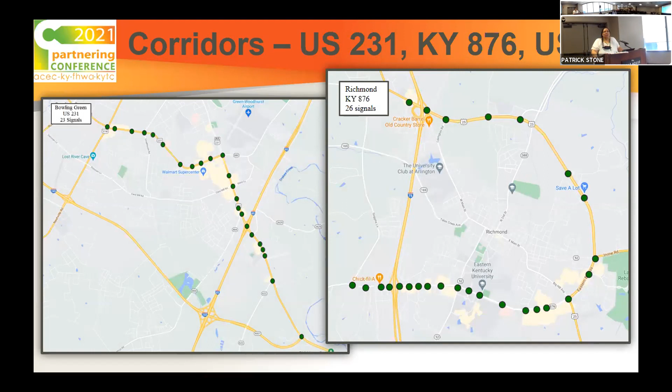As Shane mentioned, 2 corridors were selected for this project. US 231 in Bowling Green, which consists of Scottsville Road and Campbell Lane, and Kentucky 876 and US 25 in Richmond, the bypass. Several factors played a part in our decision of making these 2 corridors our proof of concept and an introduction to ATSPMs. Each corridor has unique features, as you can see, and similar.

As for Richmond, the southern part of Kentucky 876 is an urban area, whereas the northern section is more rural, which allows for uncoordinated signals, speeds of 55 miles per hour, and intersections are spaced further apart. The Richmond bypass also has on the urban section entrances for Eastern Kentucky University and the hospital, which allows for a different flow of traffic. Bowling Green has a frontage road that runs parallel along Scottsville Road, and it also has preemption with the Bowling Green City Fire Department.

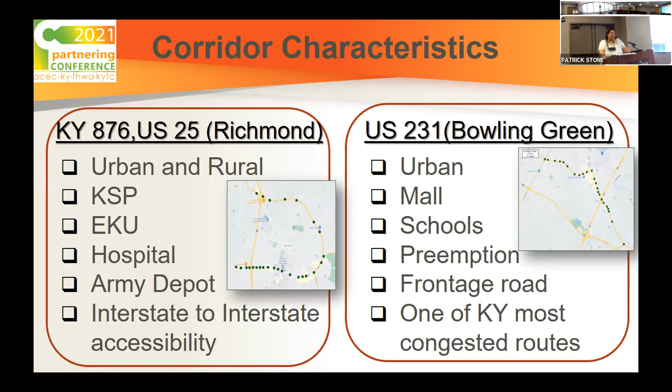As you'll notice, both of these corridors have several challenges and concerns that represent why we chose them. Congestion and spacing of the intersections and spacing of the frontage road for Bowling Green was also another key point. Spillback, which is when your left turn storage is not sufficient to hold your left turn queues and spills back into the through lane, preventing them to proceed through the intersection. We also had split failures and progression. In Richmond, we also have varying traffic with the university for football games, graduations, things like that.

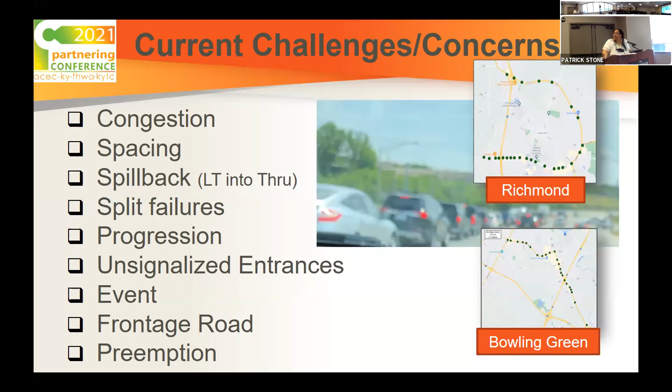And on Scottsville Road, when you look at some of those challenges, even though it's a benefit that we have the preemption for the fire department, those signals are coordinated and synchronized along the corridor. So when the preemption is activated for the fire department, that gets those signals out of sync and it affects your progression along the corridor. So Zeke will now talk about equipment upgrades.

All right. Now, as Telma just said, I'm going to be talking about the equipment that we not only upgraded, but we also had to add a few pieces to this project. Now, first off, I'm going to be talking about the controller. The controller is the brain of the traffic signal. It's what tells it what to do, when to do, and pretty much how to do it.

And we started out with a 170. Now, we've had this for about the last 30 years; it's 1970s technology. Basically, there's a 6-digit LCD display in the front with a 16-digit keypad. You have to know codes. You have to know basically exactly what you're doing in order to program anything.

Now, our predecessor, Glenn Anderson, actually developed a program called TransPHAT. And what we do with this is we use it to program the controller in a very graphical fashion. This is basically what's allowed us to use this for the last 30 years. Now, about 5 years ago, we discovered that we were going to start to have problems, not updating, but replacing and finding new equipment for the 170s.

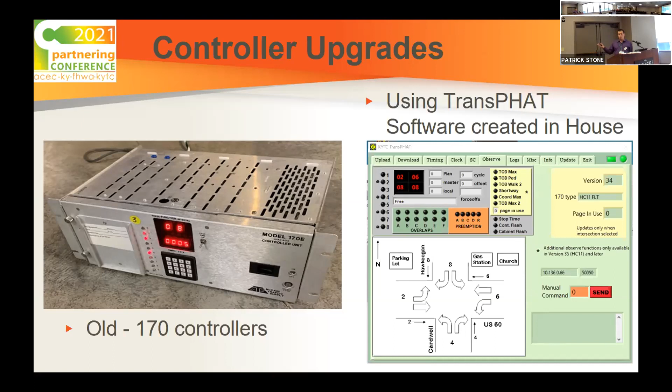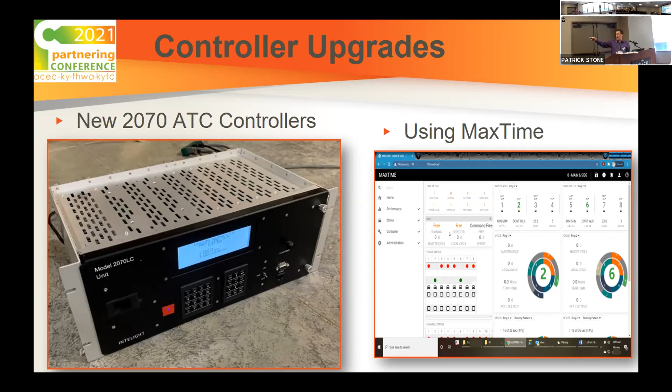So we went on a search and we decided to change to the 2070 ATC controller. This controller on the front panel has an 8-line, 40-character LCD display. Along with the 16-digit keypad, it has an additional 12 keys with arrows and escape keys. And it also serves up a web page if you're connected to it through an Ethernet connection. We use cellular routers to communicate. And you have a little taste of what the MaxTime page looks like.

Moving on, we have had to upgrade our detection. Now, I kind of have to go back to discuss what detection is like in the state of Kentucky. For about 95+% of the signals in Kentucky, we use what's called semi-actuated. What this means is that the side streets and the left turns have detection. However, the main line does not. Now, you might think, well, the main line is the most important street, so that could be problematic. But what we do is we put this on recall, so now no matter what, there's always a call on the phase.

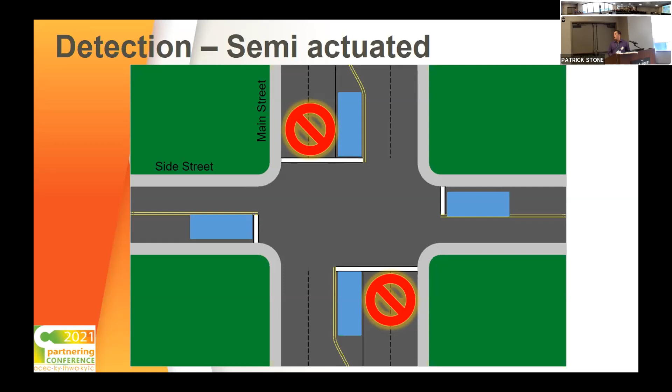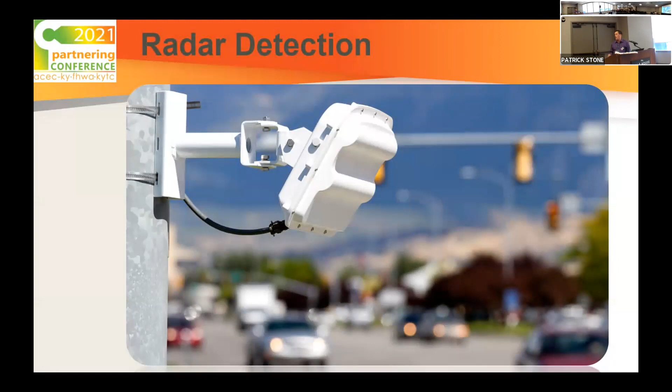Now, for the ATSPM side of the project, we needed this detection. So we had to come up with a way to fill that gap, and we decided to go with radar detection. Radar detection is very unintrusive. Basically, you can install it without having to spend too much time on the roadway. I think it took about a week on each corridor to install all of the radar detection and fill all the gaps.

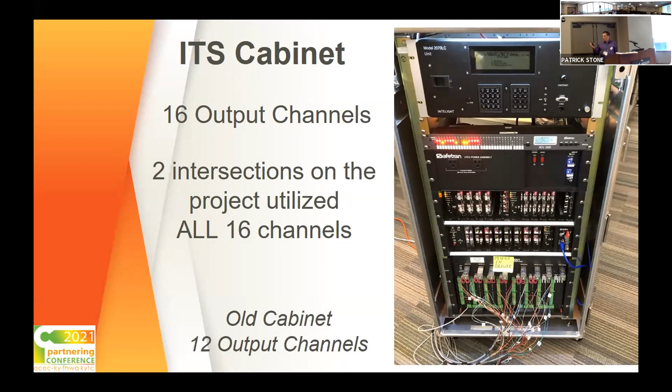Next, this one was a little more of an extra benefit. We didn't really have to do this for the project, but in 2 locations, we decided to install what we call an ITS cabinet or a serial cabinet. The biggest benefit as far as this project went was they have 16 output channels. The old cabinets only have 12 output channels.

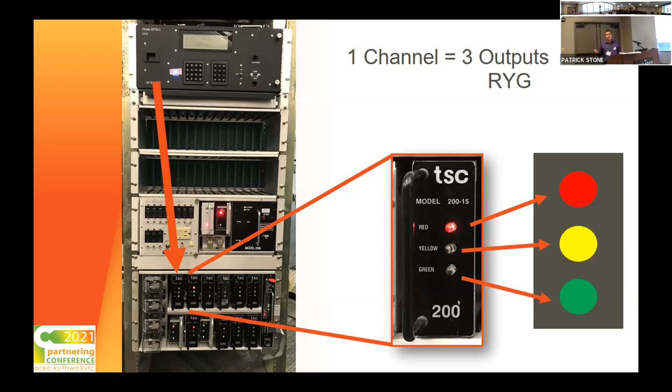Now, an output channel is 3 outputs. Typically, it's red, yellow, green for most cases, though you do have heads which are walk and don't walk, but that's a different story. So in the old cabinet, you've actually got 36 outputs, versus the new cabinet, where you now have 48 total basic lights that you can turn on and off.

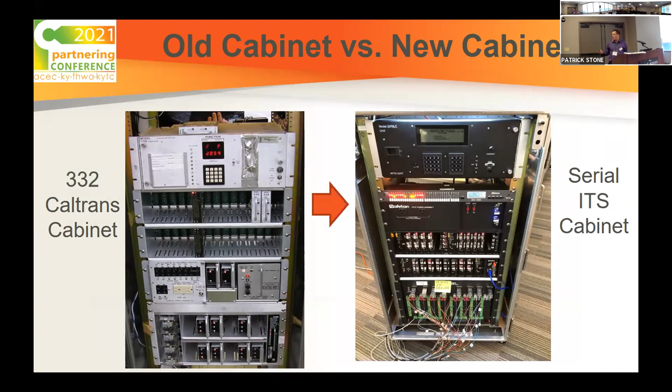Now, if you look at the left side of your screen, you'll see the 332 Caltrans cabinet that does have a 170 in it. Now, I will make a note, you can use the 2070 in the old cabinet. They work perfectly fine, and that's what we do when we're switching over. But it's considerably different than the serial cabinet here on the right side of the screen. The real key difference is how the controller communicates with the cabinet.

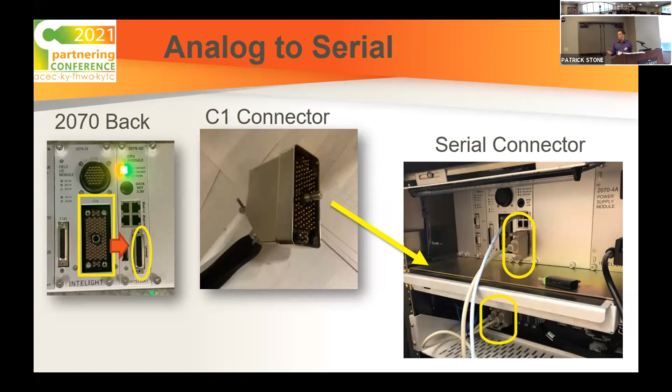On the left there, you're going to see the back of the 2070, which actually has both outputs. In the middle, you're going to see a C1 connector. That's an analog connector. Every pin controls one output. But the serial connector is basically a 25-pin printer cable, and it communicates to the controller through a digital format, or machine code, if you will.

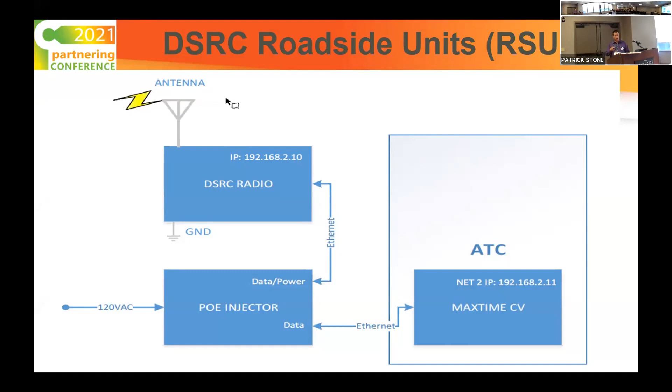Now, moving on, this is some new technology that was added to the locations, and this is the DSRC roadside unit. This is kind of a conglomerate of devices, but we call it the RSU, for roadside unit. It basically consists of a piece of software that resides on the controller, which sends data through a PoE injector, which is just power over Ethernet. It applies power to an Ethernet cable that then sends that all up to the DSRC radio.

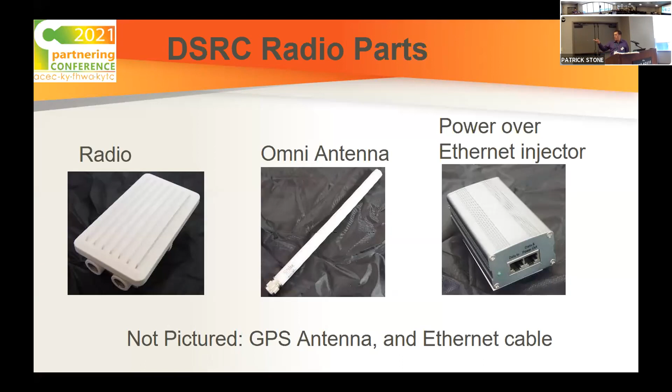And at this point, I'm going to hand it over to Telma to discuss a brief history of the ATSPM project.

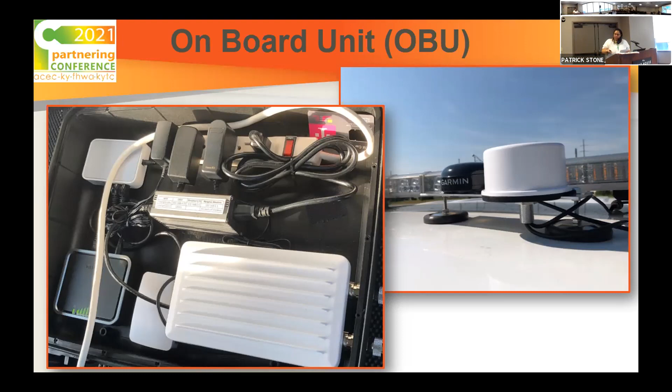You might be asking yourself still at this point, what is ATSPMs and why do I care? How's it going to help me get to work, to the grocery store, to my kids' school, wherever? How's it going to benefit me? Well, the 2070 ATC controller is one of the key components that allows us to collect this information because it collects high resolution data. About 5 years ago or so, I heard an analogy, and I've heard it several times, on the best way of explaining what ATSPMs are.

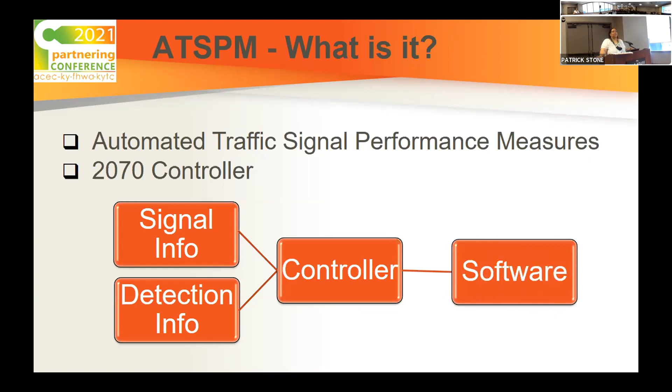So picture a fitness tracker on your wrist. What is it? It's an accelerometer that collects data every second. Well, that data is then sent to an application that analyzes the data and will tell you how many miles you've traveled, how many floors you've gone up, your calories burned, etc. So ATSPMs, this process is the same. What it does is it takes the signal status and the detector status, sends that to the controller at less than a tenth of a second, and then that information is sent to a server and the software. The software then does the analysis and creates reports.

This concept of ATSPM started about 20 years ago with Indiana Department of Transportation personnel wondering, there's data collected from a traffic signal. How can we put this into usable information, usable data? So vendors, consultants, academics, and government agencies met and had this discussion. What can we do? What are we getting? How can we put it out? And they also wanted to make sure that it was vendor neutral and make sure it could be scalable to all agencies.

I was also fortunate to be a part of an NCHRP study, which came up with guidelines of how agencies could implement ATSPMs. Around that time, Every Day Counts, EDC-4 came out, and one of their initiatives was ATSPMs. Every Day Counts is a program that promotes innovation that is proven but not widely used, and wants it also to be on a quick timeline.

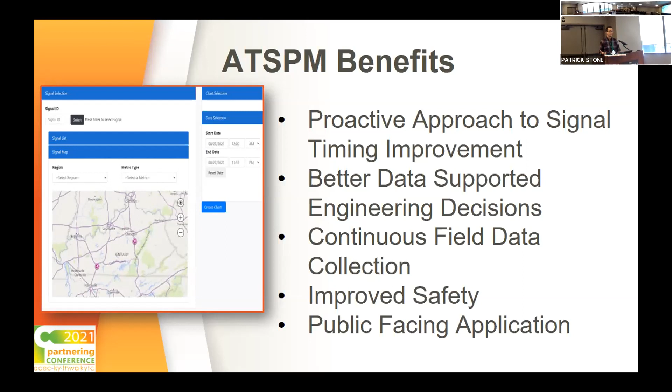ATSPMs also provide improved safety through better mainline traffic flow and also more adequate side street or minor movement service time. There's also a public facing application; that's actually what's pictured here of our application. What this provides is a web address that anyone from the public can pull up a signal that they may have an issue with and identify whether or not that signal does have a problem.

So before I get into ATSPMs and how we're using them, I first want to talk about traditional signal timing. Traditional signal timing depended on trigger events to kickstart any timing adjustments, and that was in the form of public feedback. We'll still have public feedback, I'm sure, on our traffic signals. ATSPM is not going to eliminate that, but we'll be able to more easily identify them and they'll be more quickly addressed. At KYTC, we did 3 or 5 year corridor reviews of our traffic signals through our consultant contractors or our central office staff.

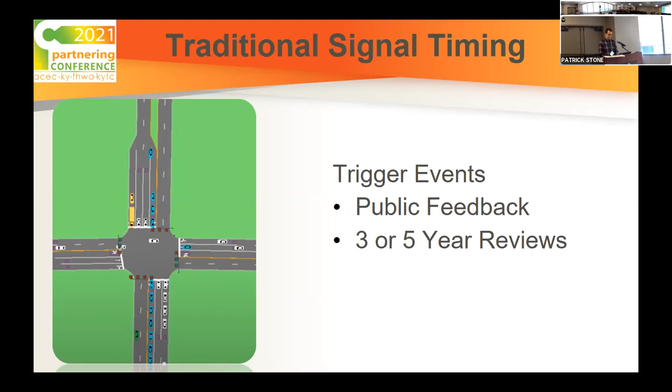So I first want to talk about how ATSPMs are used. Oh, I do want to go back. With ATSPMs, we'll be able to do a lot of the modeling and a lot of the timing adjustments almost instantaneously through the reports instead of going through this entire process. Sorry about that. Okay, so I do want to talk about an ATSPM case study. This was actually just done a couple of weeks ago.

The district received phone calls that they were having trouble at a particular signal. This was at a school, and the feedback was that it was taking too many cycles. The parents were dropping their kids off in the morning, and it was taking too many cycles for them to clear the intersection. And when they came to pick their kids up in the afternoon, it was still taking too many cycles. So we were kind of missing quite a bit there. The district contacted me, and we pulled up an ATSPM report. This is referred to as a split monitor. Now, I do want to mention this isn't one of our aid intersections, but this gives you an idea of how this works.

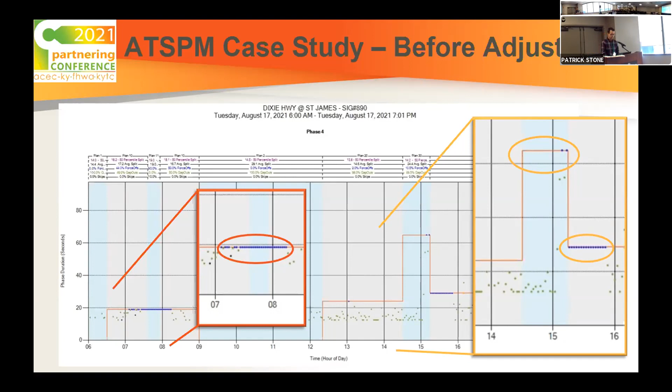The PM was a similar situation. We still got our collection of blue dots there on your right side, but here the solution was a little bit different. We tried to give them the allotted time that they wanted, if you see that large hump up top there, but we were just a bit outside. Apparently there was a change in schedule at the school. The school's now leaving about a half hour later. So here we didn't just give them more time; we adjusted the schedule to reflect their change in schedule. And so this is what the outcome ended up being.

We reduced the service time for the morning issue from 1 hour to 15 minutes, and we reduced the PM issue to just a few cycles. This took us about 10 minutes to come up with this solution and put it out there. We looked at the reports the next day and this is what we saw. With a traditional approach, this would have taken us 8 to 12 hours to identify the problem, make the changes in the timing, and observe those changes.

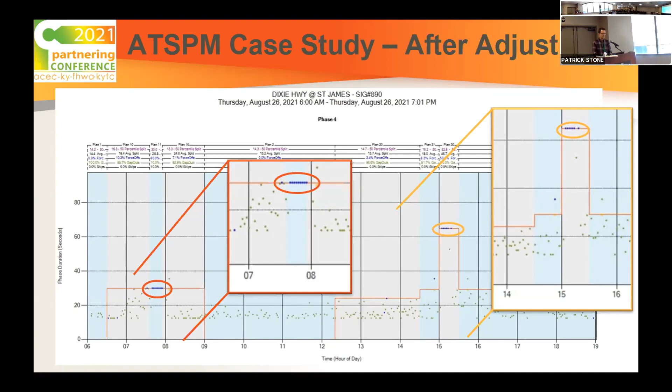So ATSPM is truly a game changer, as Shane would say. And then this particular graph is on our aid corridor. This is Kentucky 876 at Kroger. This is in Richmond, and this is data coming from our server application. And so this one is the Purdue coordination diagram. This is a pretty famous ATSPM report.

This is demonstrating the arrivals of vehicles as they approach the intersection through advanced detection. And so this is typically used for signals that are coordinated, hence the name, where the platoons along the corridor are controlled through their timing plans. And so if you see the moldy looking dots there, those are vehicle actuations approaching the signal. And then the lines on the graph are the phase outputs.

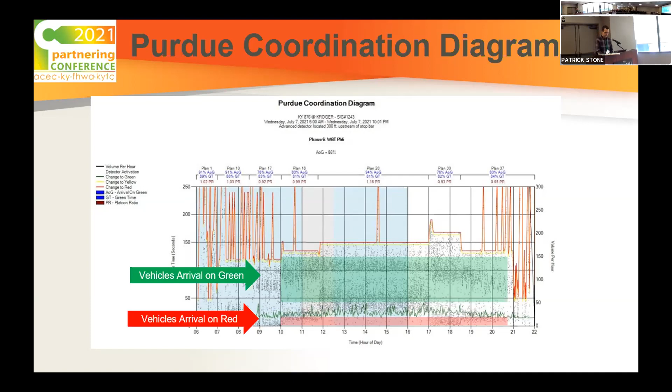So the green line is when the traffic signal turns green, and then the red orange line is when the green terminates. So here, I kind of laid this out for you. Anything above the green line is vehicles arriving during green time, and anything below the green line is vehicles arriving during red. So I want to point out an additional thing on this particular graph.

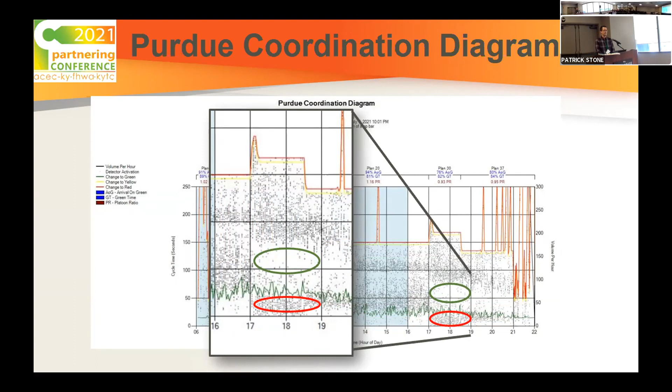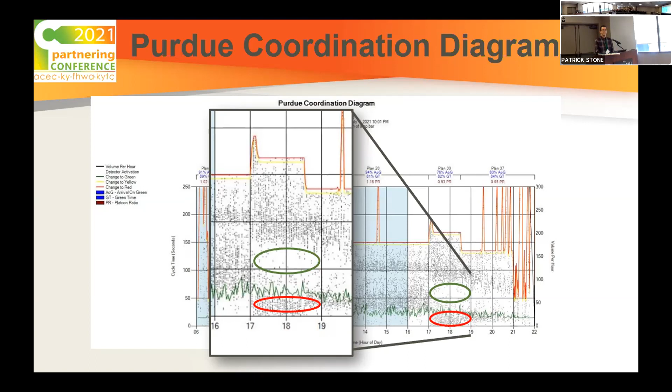The first thing I noticed when I took a look at this report was the void of dots during green time on plan 30. Not an ideal situation. This means the signal's green and there's just no vehicles approaching it. It's referred to as starvation. And additionally, we've got another collection arriving on red here. So I see a potential here to adjust the timing to capture more of the vehicles arriving on red, and then hopefully eliminating that void in the green time.

And so the final thing I want to talk about is the FHWA 2020 cost benefit analysis. The return on investment is another huge benefit to ATSPMs. The agencies that have been able to fully commit and invest have gotten very good returns. The most modest one was Maricopa County. It had almost 3 times its cost in benefit, and then Lake County, Illinois had almost 13 times its benefit to cost.

But beyond the aid project, we hope to expand the network to provide better service throughout the state of Kentucky and better performance as well. So now we haven't been able to apply a lot of the principles to the aid project because of some of the challenges that Zeke is now going to talk about.

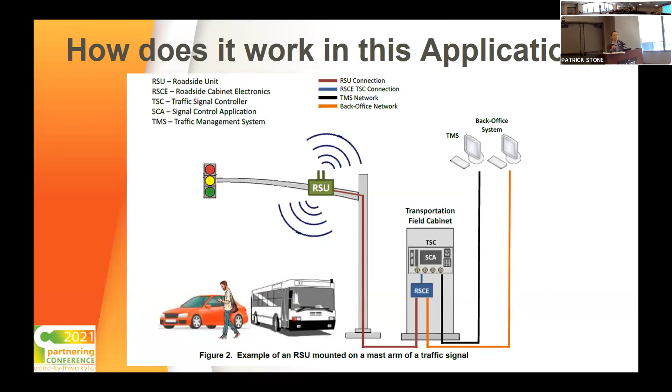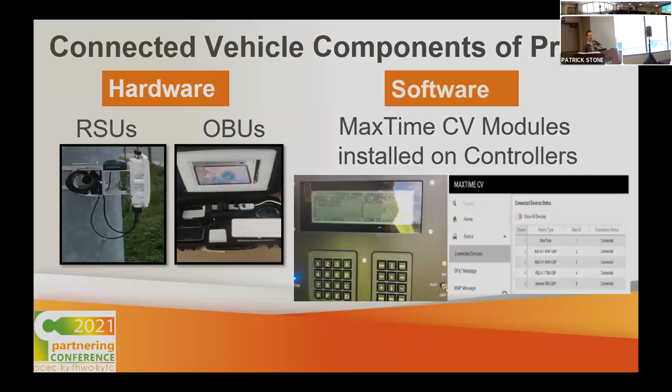I think perhaps one of the most interesting parts of this project is how to integrate the system. FHWA came up with a mapping tool where you could map your lanes so that the technology could locate you within that lane. So it could pick you up when the radio was transmitting. So the radio transmits 360 degrees at a range of 900 feet. That's a range of more than any sensors on a vehicle today. So it's a pretty big deal. The GPS survey tool is something that they use to dial in the intersection geometry to get it as accurate as possible.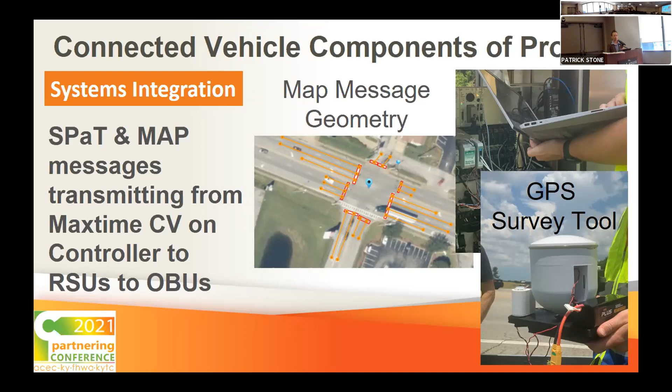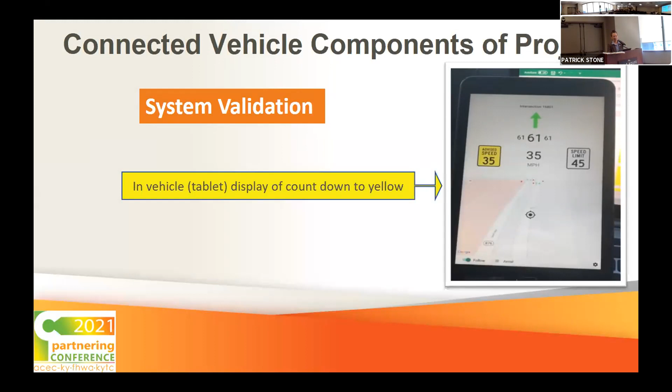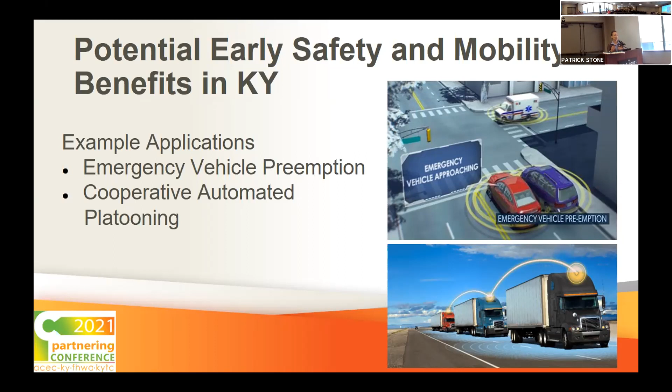So we might do this again. We didn't want to complicate this. But pivots and challenges really quickly. Most of the time this project was managed virtually. Our team lead, that's our big team lead, but our project team lead was Jarrod Stanley, and he made sure we had team meetings every 2 weeks, and these are still going on. And this was great because you had an integrator that was in Kansas City, and we had all of our other people that were in other parts of the state and in Ohio. So it was actually a pretty efficient way to manage a project. So it was pretty cool.

The RSUs were delayed. Once they were installed, we had antenna issues, so those had to be replaced. The manufacturer had to come out from California to troubleshoot all of those issues. We had lots of head scratching with the back office part of it, how to get that map set up, how to get integration working. That was a big deal for us. It was a big deal for our integrator too. We were all learning about the FHWA tool and all the back end things.

Then right midstream in this project, the FCC made a big pivot change by splitting up that very narrow bandwidth; they took quite a bit of it away, more than half of it away. What's left is still suitable for the applications that we're talking about today. And so what that meant is, instead of having use of that full bandwidth, we had to move to the upper bandwidth, and that meant changing channels. So that was a pivot. We're still pivoting on that.